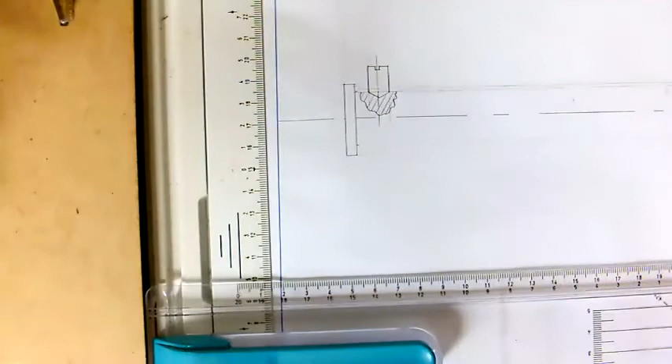Okay, so it's 19. So that's 21.

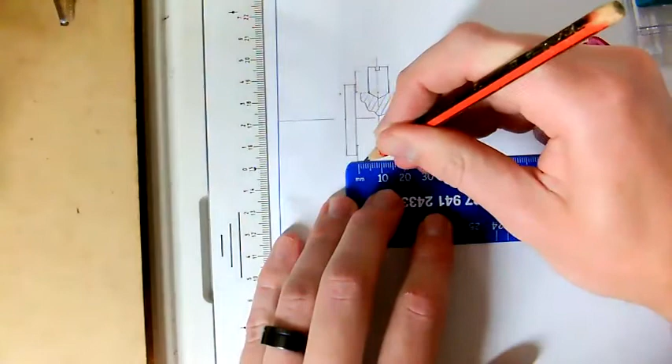16 and 19, so it's 3 millimeters. So I'm just busy with the bracket. I've started with this part there, so I'm focusing on that part there.

Now the height of the bracket is determined by that radius there, 27. And I mean the height from the center of the shaft. 27.

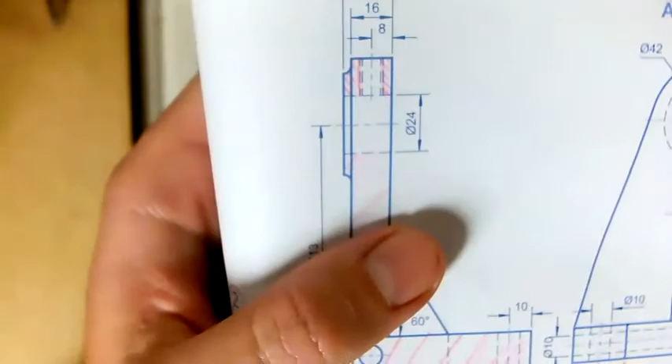Now, here's something I want to talk about, and I'm going to be honest with you about this. There's a super, super small radius there and there. So it's not a sharp corner, it's a super small radius. My compass, or I can't draw such a small radius with my compass, and I don't have any stencil to do it. So I'm not even going to try to draw that. I'm going to keep it a sharp corner.

So if you can't do it, since it's just such a small part of the drawing, I don't think you will lose marks. Maybe 1 or half a mark, but I'm not going to spend time on it. What you could do maybe afterwards is just take a freehand and try to make it round. But I'm going to leave it at a corner because working with a radius of 3 is actually difficult for me to do it. So that's my opinion.

So I wouldn't be bothered about such a small radius. It won't count a lot of marks if they even see it. I doubt that the marker would. It's such an insignificant part of the drawing. I have to be honest.

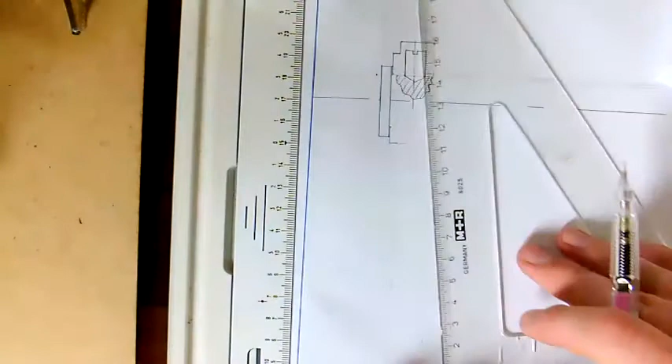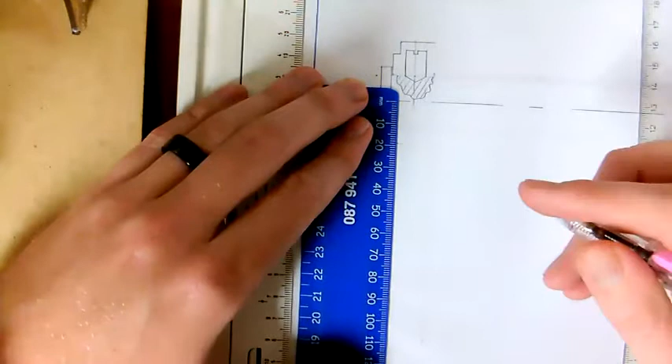I think as a marker, I would have missed it. But if they don't in the final exam, it can't be more than half a mark. If it's that much, it could be less. So that's my opinion, I will just leave it. I'm not going to even be bothered trying to draw such a small radius. It's just really difficult.

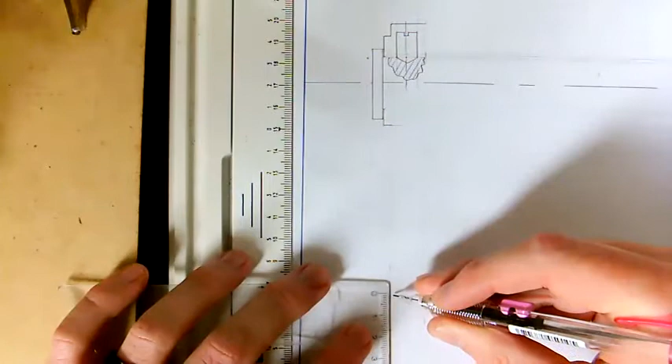And then if you've got time at the end, go back to it. So as a Matric, you have to critically think about what will give me the most marks in the shortest span of time in my paper. That's what you're going for.

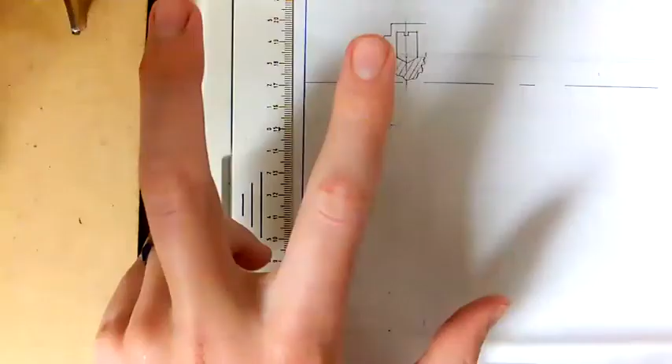Any other small detail is something you can worry about at the end. So this is my professional opinion as a Matric student. Also start thinking about how to draw faster and where you can take effective shortcuts, to lessen the amount of time you've got, or to use the time you have efficiently.

So far I'm just copying the picture, and I'm just copying the outline of the bracket. Just remember which parts we can hatch and which parts we can't, or shouldn't, not can, shouldn't. Okay, it says it's a 60, so I'm going to use my 60.

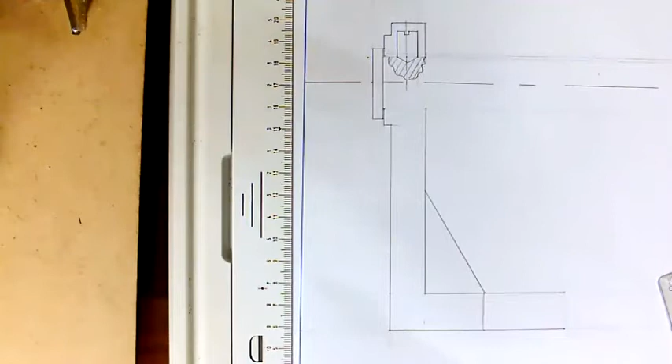I just need to add the little circle. It's in the middle, so it's 8. So it's 8. The circle's in line with the grub screw.

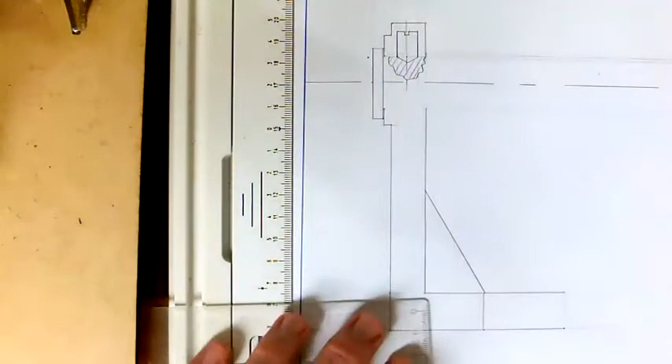Then now they don't give us the height directly, so let me just quickly go there. Let me just double check now. I can't see, let me just zoom in as you can see it. They don't give us a height for the circle.

Even on the other, they don't give it the height, but what I can see, it has a diameter of 10 and the total height is 15. So if I take 15, subtract 10, I'm left with 5. And it's equal parts top and bottom, so 5 divided by 2, I'm working with 2.5.

Now 2.5 you can still do because it's halfway between 2 and 3. So there's 3, there's 2, so it's plus minus 2.5, is about there. Set my compass to 5.

Yes, your camera has gone out of focus. Thank you, focus left the chat, sir.

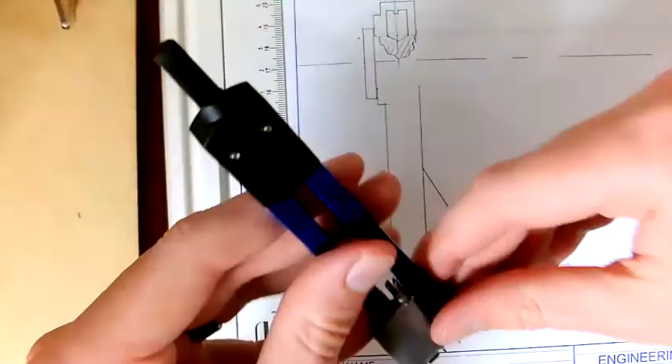I really dislike drawing small circles because my compass usually slips. So something that's also necessary to practice. I'm going to do my best here, but small circles are horrible. If you've got a stencil for circles, this is where it's really handy to have one.

That's way too big, my compass is a bit limited. Let me see if I can quickly grab a stencil if I have one like that. I don't think so.

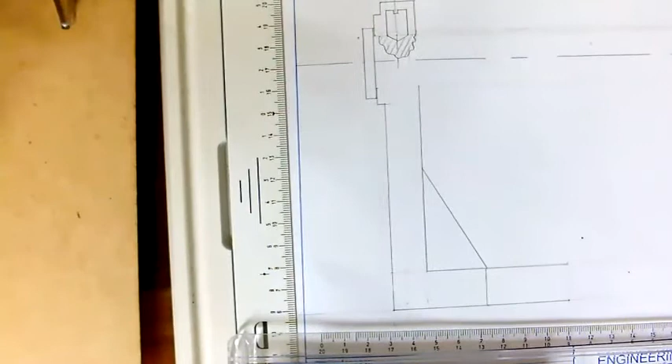So here's a suggestion from me. If you struggle with the small circles like I'm doing, get a stencil. I'm gonna try this, let's see.

Okay, it's 10, but it's 1-to-1. Yeah, okay, so.

This 5 seems to be too big. Okay, there it is, there it is.

Now I'm warning you, I don't use stencils a lot, so this might look horrible. Okay, so that's what I'm saying, you have to practice with stencils if you're going to use them.

Okay, that's not too bad. So make a mental note for yourself: get a stencil for small circles. It's going to save you a lot of headaches in a test.

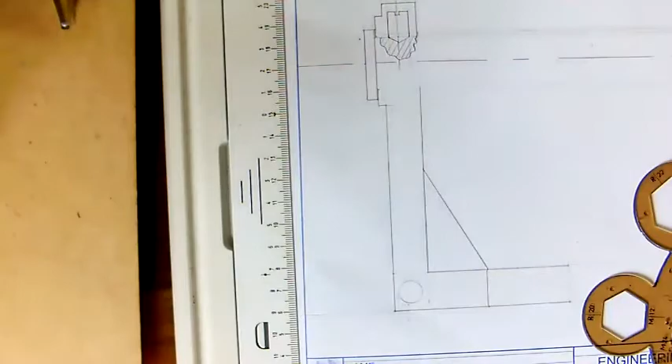Don't forget about the center lines.

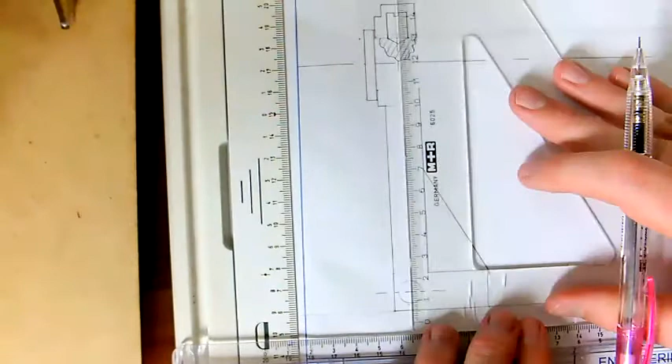Okay, there we go. Now I just need to hatch it. Okay, this was done with 60 degrees, so let me do the hatching here with 45.

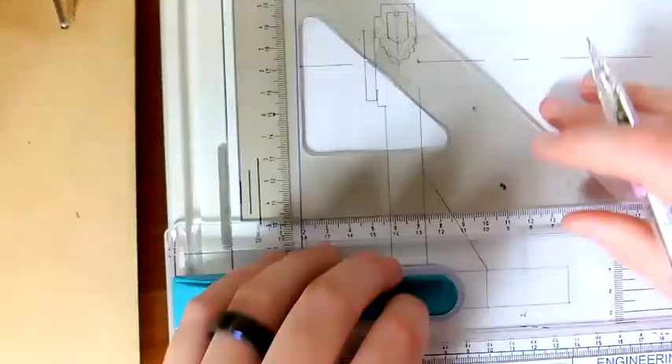Try to, if possible, swap out between 45 and 60 and 30 for every component, adjacent component. That will help a lot just to distinguish between the different views or different parts.

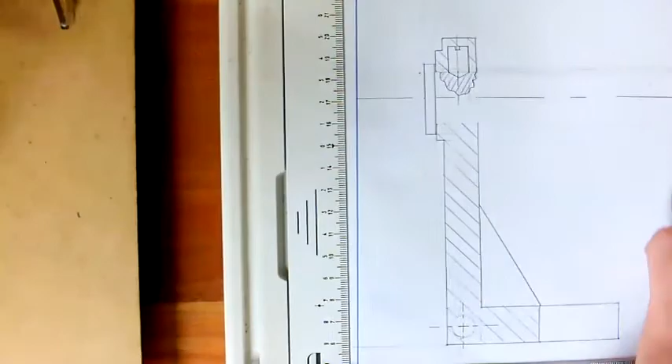I'm not going to darken. Oh, I can actually darken here as well, this part of the shaft. There, and then here as well.

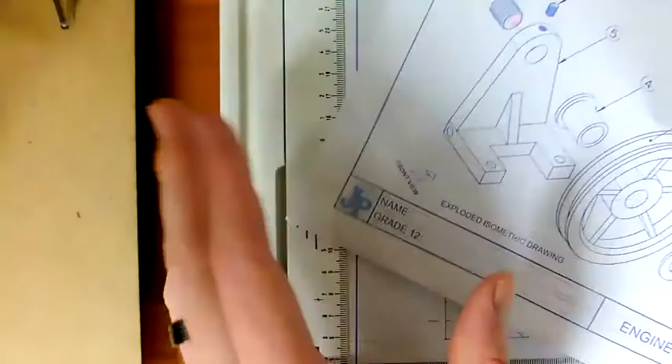Now I remember this drawing from last year with the previous grade 12s, and some of them actually hatched this part as well. Just remember, it's not hatched because there's a gap in the middle. That's why. So what you're looking at is the back, it's that part there, that's why you don't see hatching there.

And we don't hatch this part because it's a support structure, and the rest, yeah, good. So that's the bracket. Okay, so we've done halfway of the shaft, we've done the bracket, the grub screw, we've done the bracket. Now the next one is the bush.

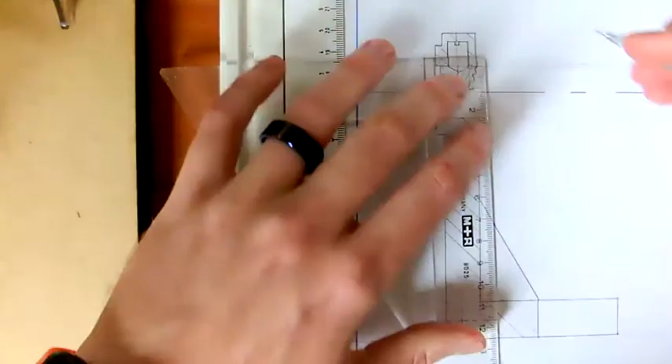This one. .42, so again, 21. So it's the same height as this one. Okay, nice.

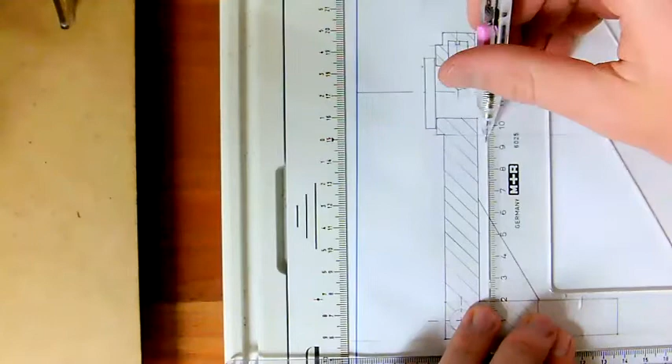This is a smaller component. I think I can do it like this. Okay.

Then it's 32, so that's 16.

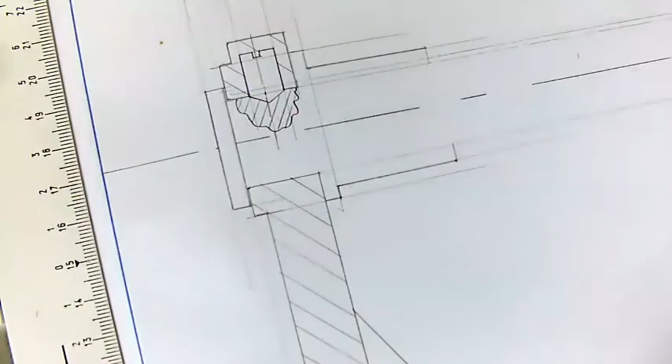Okay, there's the bush, short and sweet.

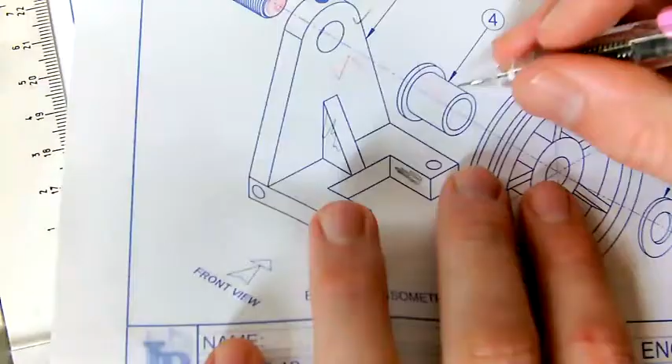So there's the bush. Okay, we've got the bush done. Now, okay, yeah, now for the difficult one, the pulley. So I'm going to make use of our planning here, but we'll have to be careful.

What I can tell you what's going to happen is this support structure here will be a tiny bit bigger than this support structure, because if you look at the right view, this one is facing, it's perpendicular to the front view. This one is not, so it's going to be squished in a tiny bit. So that's the difference you should see: bigger support structure, smaller. The rest should look kind of the same.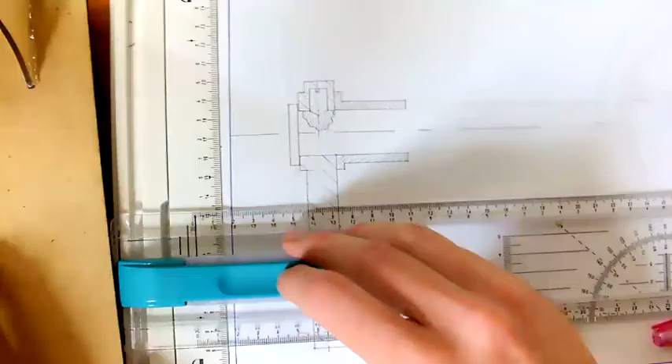Now, since I've done the pulley already on the other view, let me just focus this again. Since I've done the pulley here already, most of my measurements, I'm just going to project over with my T-square, so I don't have to go and measure again because I have it here. So to save time, don't measure. If you have a measurement already on your page, just project it. Don't go and get it again. It's usually quicker just to project.

Okay, so this is a bit out of focus, but the focus should be here anyway.

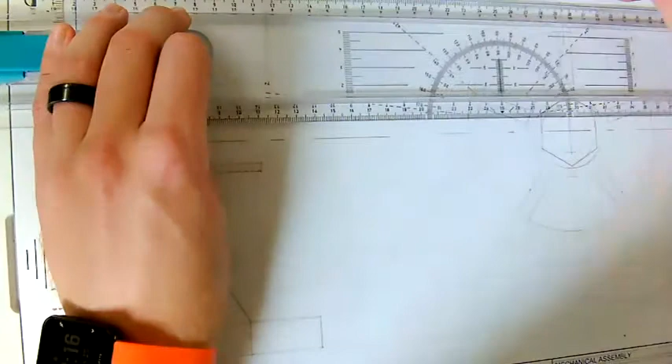Drawing from left to right, so I'm going to start there and then move that way. Remember, most of these lines you won't see anymore, it's just going to be left with the outlines.

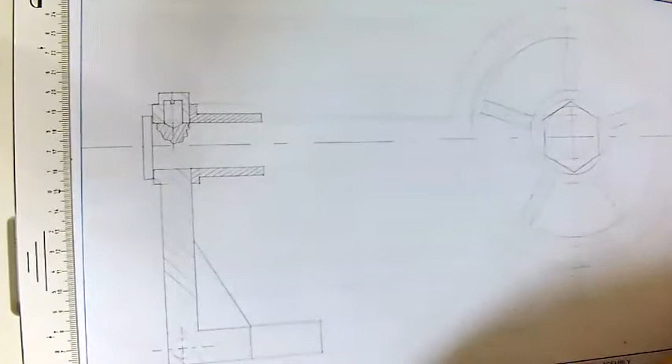So the bush is 33, and okay, so look at this. The inside of the bush, the smaller part, has a length of 33, and the space within the pulley also has a 33. So that means the bush will fit nice and snug inside the gap here, which makes sense because what the purpose of a bush, it acts as a bearing.

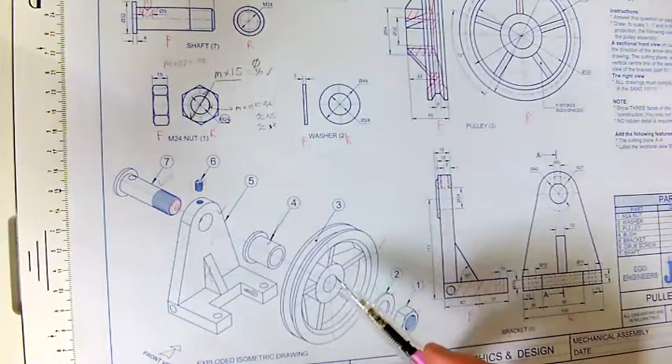So this will be, the bush will have a bit of grease on it. So when the pulley rotates around the bush, it has less friction. Because remember, a pulley is something that has a rope or belt over it to rotate, to either lift something or to rotate something else. So you want a nice smooth rotation. So this bush will fit nice and snug within your pulley, so we can basically draw the pulley around the bush.

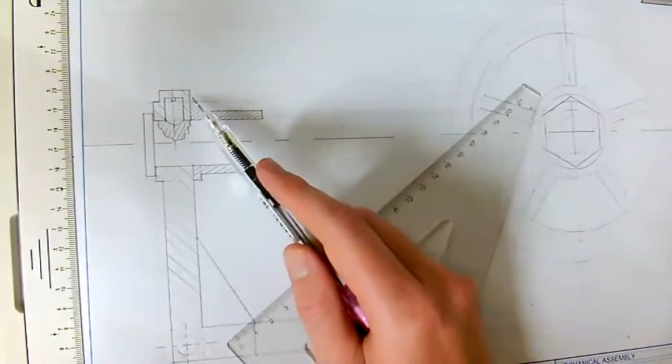It also makes sense that there will be a gap between the bracket and the pulley, because if there was no gap, then there will be friction against these two parts again. So the bit of the gap that the bush creates helps to prevent unnecessary friction.

Now what I'm now doing, I'm looking for the distance from there to there. So what we're going to do is I'm going to take 54 minus 32, which should give us 22. 22 divided by 2 gives us 11 and 11.

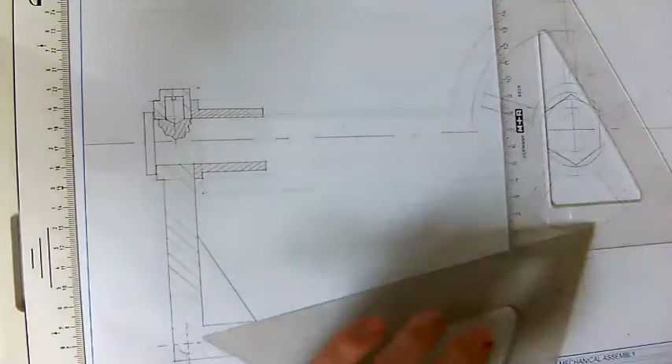I'll add in the hatching when the pulley is completed. Now I'm just going to leave it as it is.

So what you're looking at, those two blocks, is the two blocks there. That's basically that part of the pulley, if cut in half.

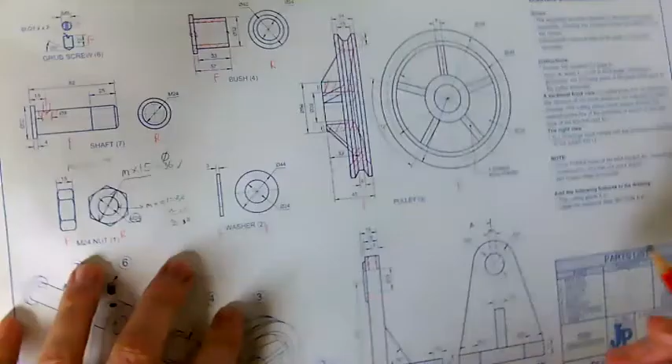Now here's something interesting. We don't have any degrees for the wedges, so we can't just start drawing the wedges. So I can't do this, I can't just go and draw the wedges. So what I'm going to do is draw these two outside parts and connect them to the wedge afterwards. I'll connect the wedge to the already drawn part afterwards.

Just want to check the time. Okay, we've got 10 minutes. So let's see if I can at least get a bit more done of the pulley, then we'll end it for today.

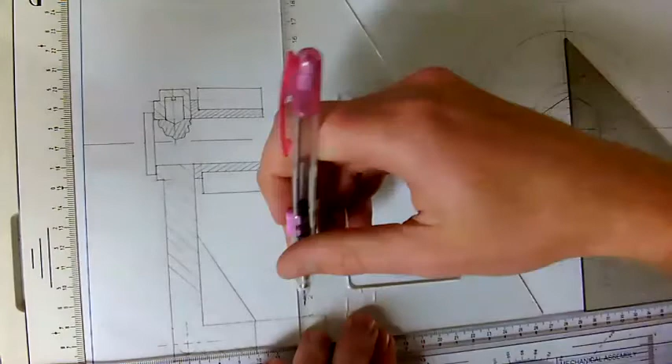There we go, the pulley. There's the top, because it's in line of the right view of the pulley, and there's the bottom.

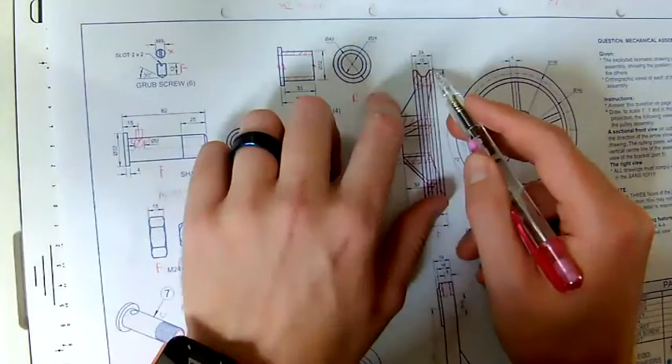Now again, for the spacing between them, they don't just give it to us directly, you have to go and work it out. So it's 24 minus 15, that gives us 9. 9 divided by 2, that's 4.5, which we can work with. So put 4.5 halfway on the line.

Now I'm trying to figure out what's the distance there. I know from there to there it's 15, but now we need to find, oh, here it is. So it's 15 minus 6, that gives us 9 again. So it's 4.5 again. The middle is 6. Then it's 4.5. And 4.5 again.

And I'm not going to go and measure this at the bottom of my ruler again. I'm just going to bring it down with my ruler.

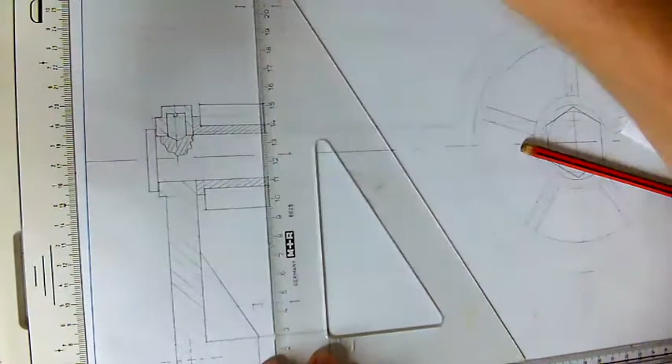Now, the spacing there is given by that hidden detail, and they give it to us here, 143. So I think the easiest way to get that 143 is I'm going to add it to my right view. Not the whole hidden detail, because we don't have to, but I'm just going to take my compass, divide 143 by 2, which is 140, that's 70, so that's 71.5.

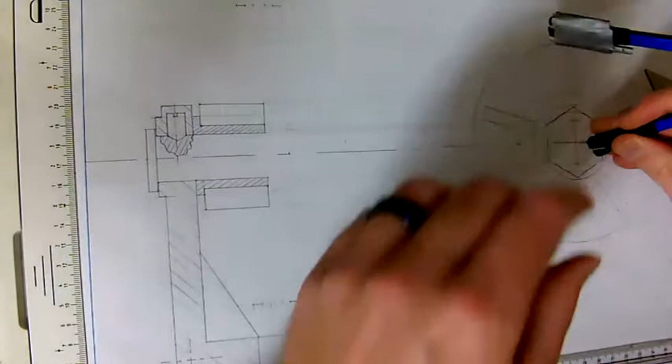And I'm just going to make little indications for myself, then project it over. You could have just worked it out, but I think this is the quickest.

Then according to the information given, it's 13 millimeters.

I'm just trying to find out that distance there. Work out this distance from there to there. Oh, it's the inside, this inside angle. We've got it, it's this one. So it's that line there because it comes from there, and then this line here.

Finally, we can connect the wedge and the pulley together.

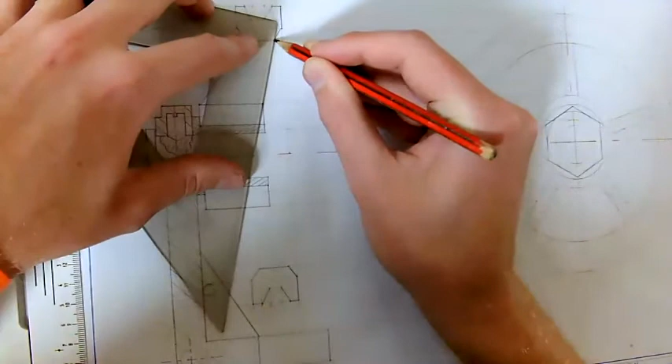Just be careful with the bottom part. As you can see, the wedge only starts there. So compare the two, let me take it from the top. First, compare the top, there's the wedge, the beginning of the wedge, there, and there's the end. But if you look at it from the bottom view, there's the wedge. Okay, so it's a lot higher, and the wedge ends there. So you just make a note of this.

And oh, I'm looking at the wrong wedge. We have to look at this one because we're going to cut it in half and remove this part. So let's look at, so there's the one wedge. I'm going to draw it in red so you can see it. So you'll see that part, and you won't see that part.

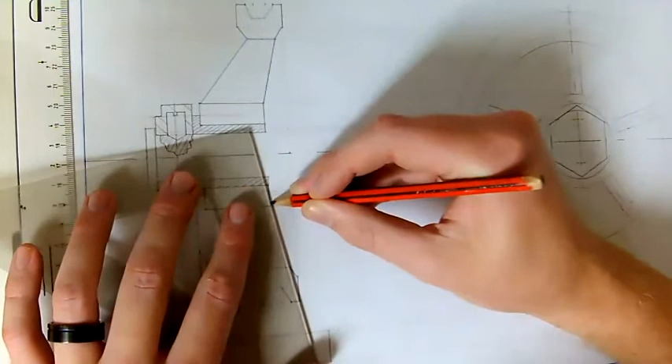So that means the wedge will come from... check again. That's exactly what I didn't want it to do. Sorry, I made a mistake. Where's my eraser? Oh, here it is. Try it again.

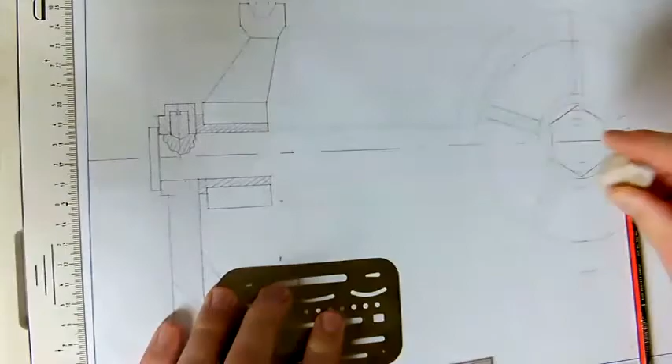So there's going to be a straight line here, and then the wedge starts. Because look again at the red, the wedge is not in the center, it's on the side. There we go. So you see, it's a bit weird, but that's how it looks like.